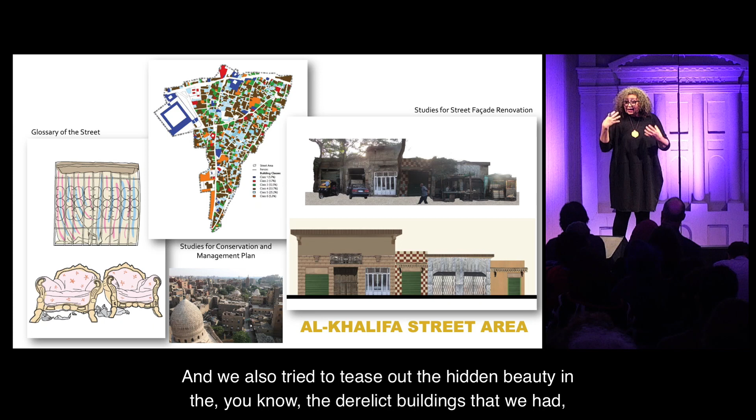And we also tried to tease out the hidden beauty in the derelict buildings that we had, and to see how this beauty can come to the fore without us changing the heritage within this area.

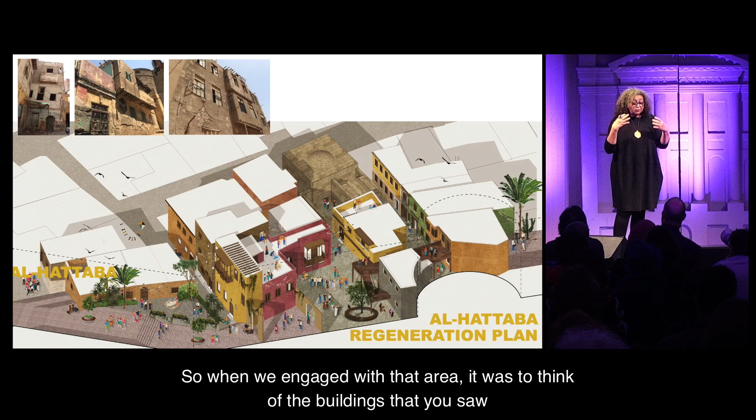This is the second neighborhood, Al-Hattaba, at the foot of Cairo Citadel, for those of you who know Cairo. In this case, it was an area threatened by demolition. So when we engaged with that area, it was to think of the buildings you saw that were in a very bad state, and think of how they can become new spaces.

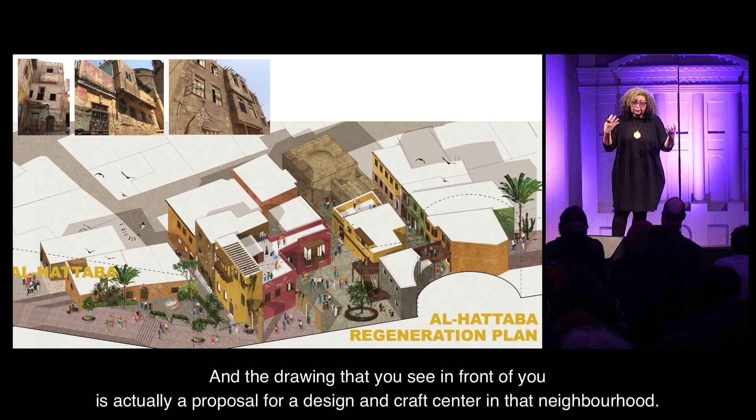They can be reactivated as spaces for the community. And the drawing you see in front of you is actually a proposal for a design and craft center in that neighborhood. We managed to get a stay on demolition on the neighborhood, but it's still, unfortunately, in a bad condition, and we'll see how we can change that in the future.

You would expect me to show you drawings and documentation of the buildings. But what I'm going to show you is what we discovered over and over as we work in conservation: that without seeing the meaning of these buildings in the hearts and eyes of the communities that visit them, live around them, live within them, the buildings do not make any sense. So what we as architects and conservationists have learned over and over is that it is all about the community, it is all about the people.

This is how we decided we want to work. What we try to do is engender a sense of belonging and ownership that communities should have for this heritage, because without that sense of ownership, it means nothing and it will not be preserved. That is what we've been trying to do for the last 10 years.

I'm going to show you a 2-minute film that encompasses the work we've done. Let's see if this works. Yes.

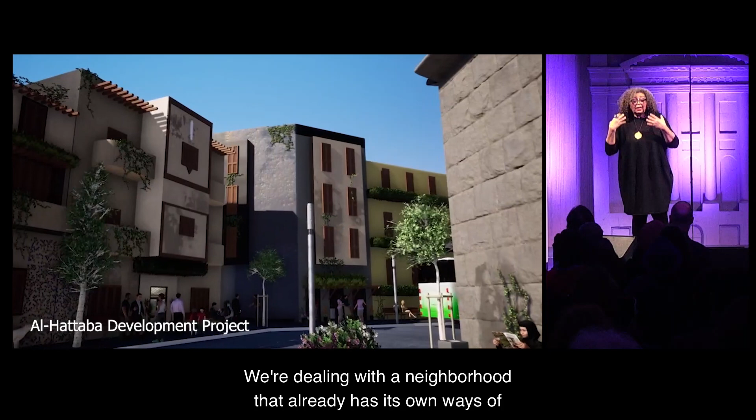On an urban level, it becomes more complicated because we're dealing with a thriving neighborhood, one that already has its own ways of coping, growing, and thriving. The question is always how to tap into these patterns, not to disrupt them, but to actually build on them.

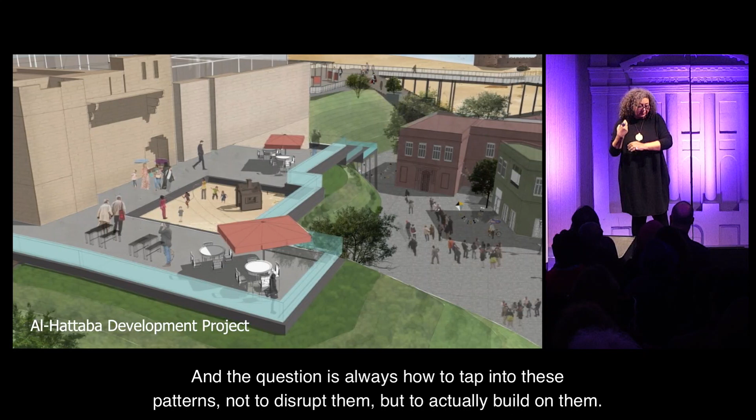This is the neighborhood I was talking about that is threatened by demolition. For those interested in conservation and heritage management, a lot of the work we do is documented in toolkits, publications, and reports published online, almost all of them in both English and Arabic.

I'll talk about this in more detail in a minute, and this is the work we do on an urban level, particularly with the problem of groundwater, which I'll get to shortly. Let's look at the first of 3 very short examples.

I have 3 minutes, so 1 minute each. I think what we're always trying to do as people working in this neighborhood is balance between meaning, which is what we normally get as architects interested in heritage, and use, which is what we should work on to make this heritage relevant and important to communities.

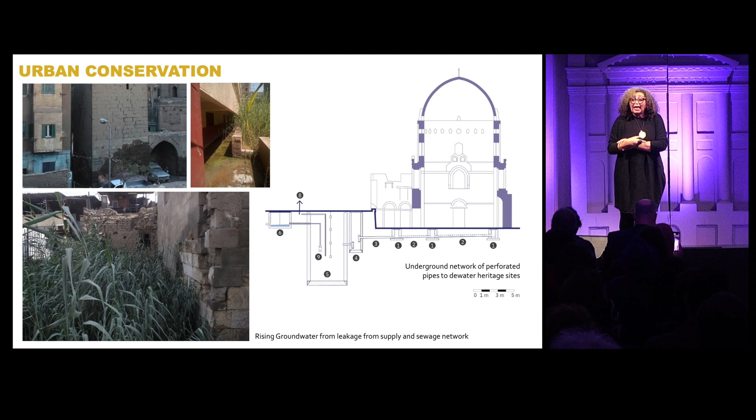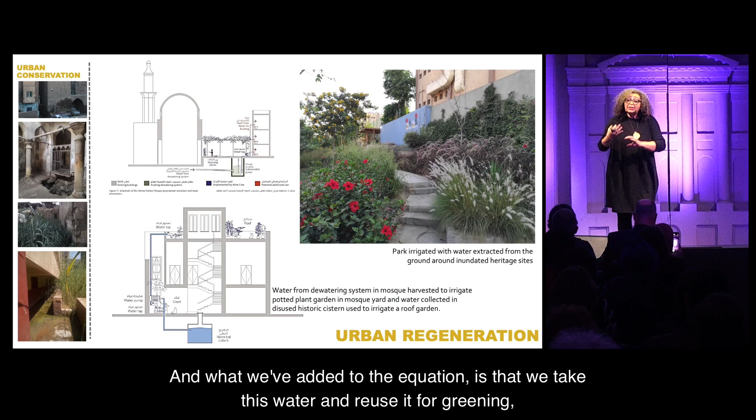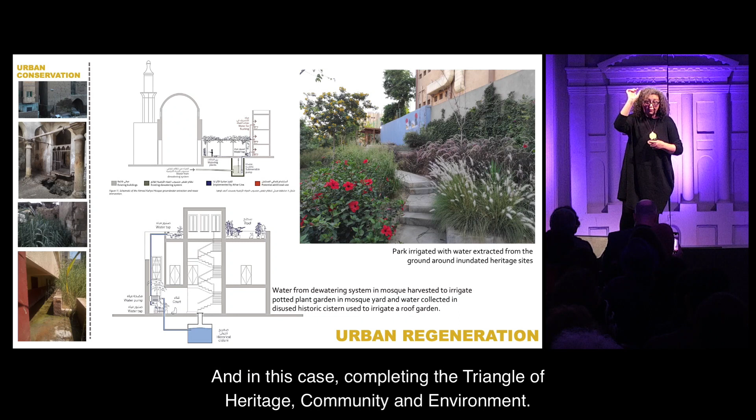The third example is the problem of groundwater, which affects the historic buildings in the neighborhood. This is water leaking from the network pipes and sewage pipes, so it's important to get rid of it somehow. What we've added to the equation is taking this water and reusing it for greening, to create parks and gardens for the community, completing the triangle of heritage, community, and environment.

This is my last slide, and I still have a minute, so I'm actually going to finish early. This is just to thank the people we work with, both the communities we work with and the team of Athar Lina. I'm not going to dedicate this prize to them, this is their prize, and I would really like you to join me in thanking and honoring them for the work they do. Thank you.